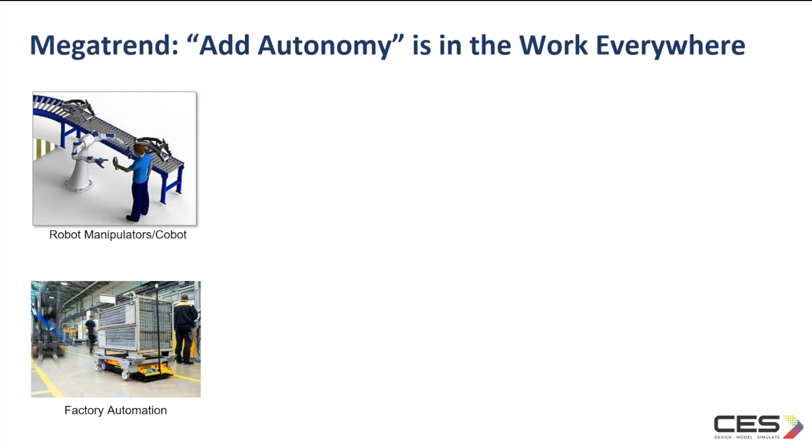Autonomy is a trend happening across industries. You will find defense contractors building next generation autonomous underwater vehicles, autonomous drones, unmanned ground vehicles, and autonomous vessels. You can also find traditional big machine makers in construction, mining, and agriculture actively investing in autonomous capabilities. And in the advanced air mobility trend, there are also commercial aircraft makers adopting similar sensing and automation technologies from robotics into their aircraft.

Today's webinar is the second in the series about autonomous systems. The first webinar was held on 17th September, and in that we covered model-based system engineering for autonomous system design, from architecture to implementation, followed by verification and validation. We explained the different MathWorks tools that can be used for those activities.

Today's webinar is more focused on system design and dynamics modeling, and we will also give an overview about software in the loop, processor in the loop, and hardware in the loop testing.

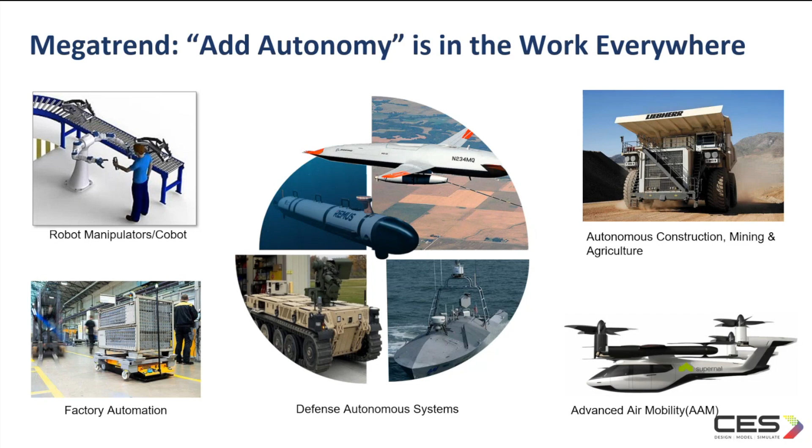Here is the agenda of the webinar. First, we'll have a look at different phases of autonomous system development where MATLAB and Simulink tools can be used, and highlight the focus of the webinar series on autonomous systems. Secondly, we will consider common questions from robotic engineers. Next is system design and dynamics modeling for autonomous systems, and what MathWorks tools are available for the same.

It is followed by an overview on different testing methods like software in the loop, processor in the loop, and hardware in the loop, with Simulink Real-Time and Simulink Test. I'll also explain different MathWorks support mechanisms.

As I mentioned, we were conducting a series of webinars on autonomous systems. Webinar one focused on model-based system engineering for autonomous systems, from architecture to implementation, verification, and validation. In webinar two, today's webinar, we will talk about the platform design and also cover part of the verification and validation, mainly the SIL, PIL, HIL methods.

There is an upcoming webinar also, the date for which will be announced through the CES website, LinkedIn pages, etc. In that webinar, we will cover more towards the autonomy algorithms used for localization, planning, sensor fusion, and control. We will also cover hardware deployment in the next webinar.

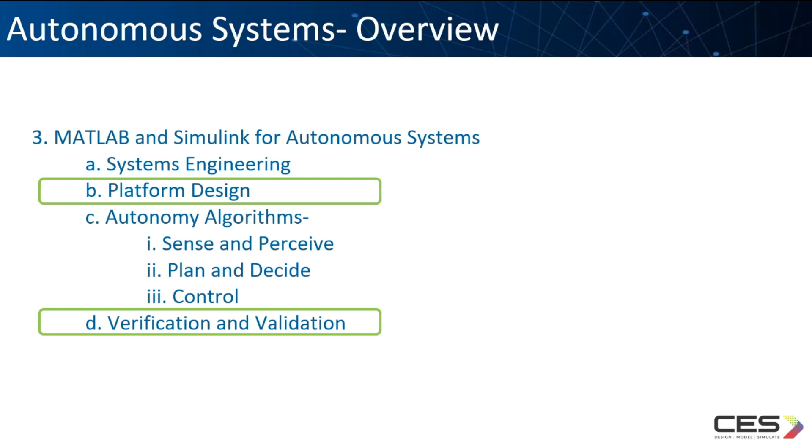Let's start with the common questions from robotic engineers. I have listed things like: how do you model the sensors and platforms—mainly the robot models you need to model, and then the sensors need to be modeled. And when it comes to the autonomous algorithms part, how can we design the algorithms for perception?

How do you do the planning algorithms? How can we control it? And when it comes to the hardware part, how do you test and deploy the robotic applications? How can we simulate it? How can we analyze it? How can we deploy the algorithms? How can we generate the code for these algorithms?

So throughout this webinar, we will mainly consider how can we model the robot models, how can we model the sensor models, and as we have included an overview of SIL, PIL, HIL, we will also be focusing a little bit on the testing and the deployment side.

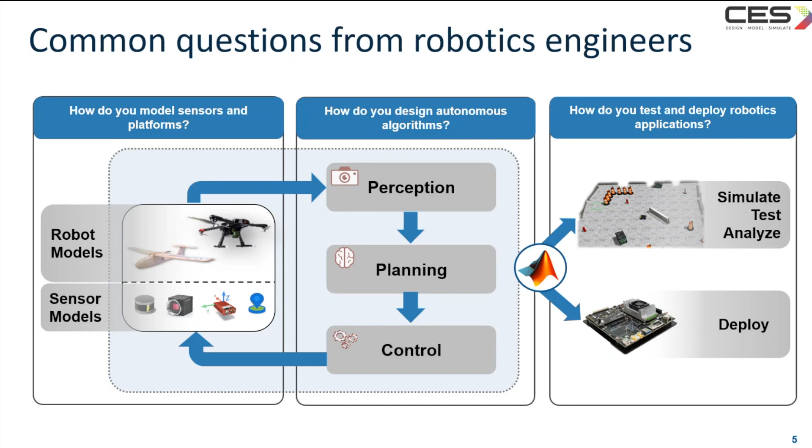Let's go to the system design and dynamics modeling part. As you know, the autonomous system domain is very vast, and it's impossible to discuss the platform design of all verticals. So what I have decided is we will take examples of platform development for UAV, AUV, or mobile robot, but we will share the details of MathWorks solutions which can be used for autonomous systems in general.

I have shown this slide before. Let's start with the modeling of the robots. So how do you model the robots and the sensors? When it comes to modeling, it can be a physical model, or it can be a kinematics model, or it can be an external model.

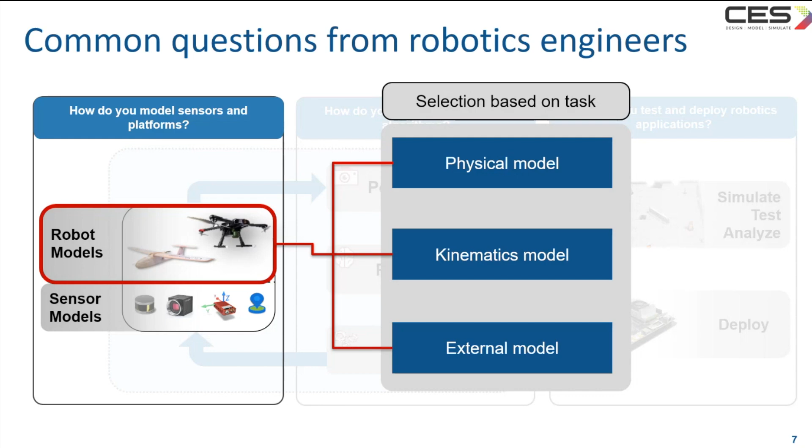If it is a physical model, let's consider the example of a bumper car. Okay, before going into the example, let me add one point here.

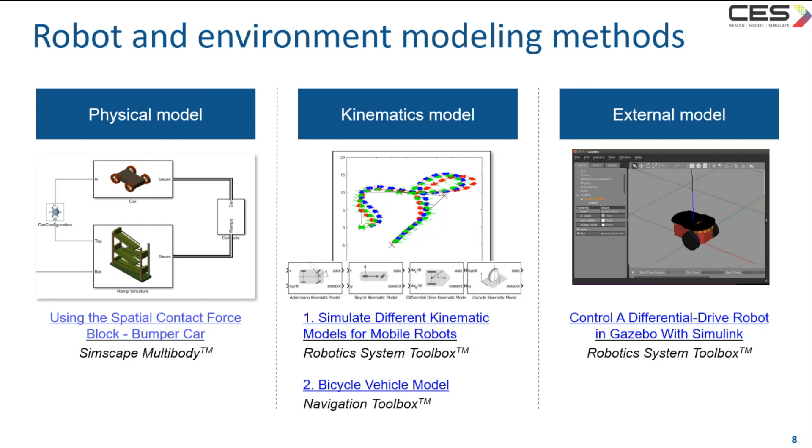Coming to the modeling of robotic dynamics, again the main tool we suggest is Simscape Multibody. It supports dynamics modeling for automotive, two-wheeled vehicle, crawler, legged, and drone systems. It comes with a contact forces library, and it also supports CAD import from third-party tools. We'll see more details of the capabilities of Simscape Multibody in upcoming slides.

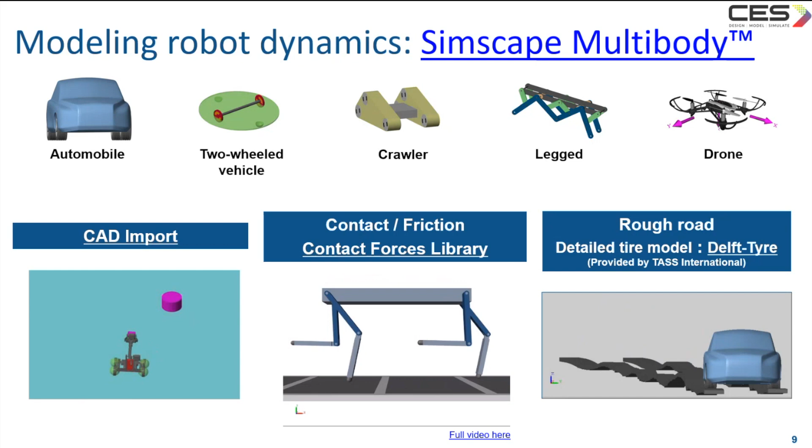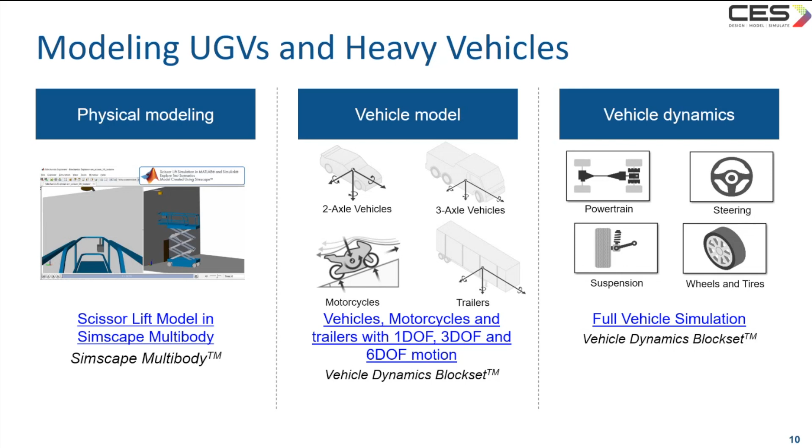This is an example of modeling and control of a Mars rover. This shows the steps included: Mars rover modeling, terrain modeling, spatial contact force modeling, path tracking control, and end effector control. The grid surface block is used for modeling the rigid terrain surface.

The tools used for this example are mainly Simscape Multibody and Robotics System Toolbox. Point cloud and spatial contact force blocks are used for modeling the contact between the rover wheels and the rigid terrain. Pure pursuit is used for path tracking control of the rover, and kinematic solver with trapezoidal velocity profile trajectory is used for joint space trajectory planning and control of the rover arm.

You can find this example also on the MathWorks website. We'll see the details of it in later slides.

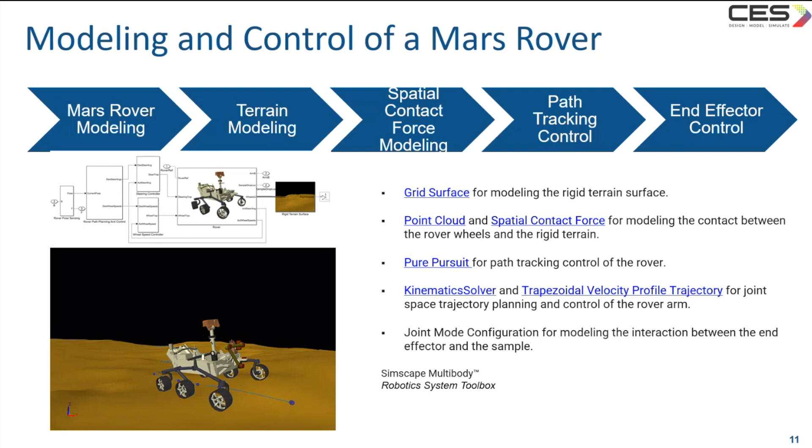Next is about sensor models. How can we import the sensor data? How can we simulate the sensor models? If it is an external sensor model, how do we work with that?

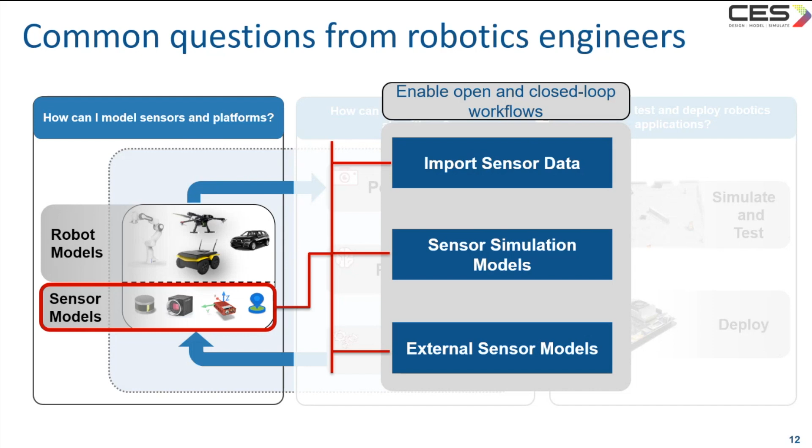So these examples, the first one is about importing sensor data. It uses the read data block to play back data from a Rosbag log file recorded from a Jackal robot from ClearPath Robotics. This example uses ROS toolbox and Simulink.

The next example is about how to model IMU, GPS, and INS. This is done with the help of navigation toolbox, which helps you model inertial measurement units, global positioning systems, and inertial navigation systems. You can model specific hardware by setting the properties of your models to values from hardware datasheets, then tune the environmental and noise properties to mimic real world environments. You can use these models to test and validate your fusion algorithms, or as placeholders while developing larger applications. You can search with the same text on the MathWorks website to find this tutorial, which provides an overview of inertial sensor and GPS models in navigation toolbox.

Next is about the external model, specifically co-simulation between Simulink and Gazebo. This example mainly uses Robotics System Toolbox and Simulink, and explains how to set up a synchronized simulation between Simulink and Gazebo to send commands and receive data from Gazebo.

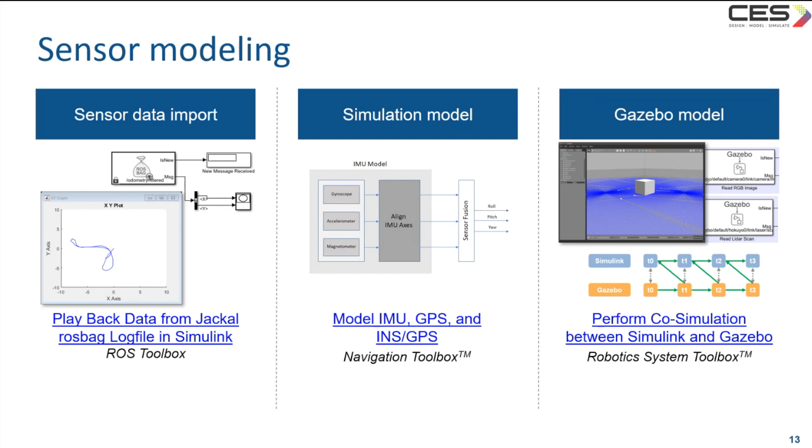We have more examples that will help you find errors in wheel encoders, and show how to create synthetic sensor data if you need that. The example in the middle helps you create synthetic sensor data from an inertial sensor. On the right side, it's about automatic tuning of the INS filter, which is an object based on a continuous-discrete extended Kalman filter that estimates device pose. Manual tuning of this filter, or finding optimal values for the noise parameters, can be challenging. This example illustrates how to use the tune function to optimize the filter noise parameters.

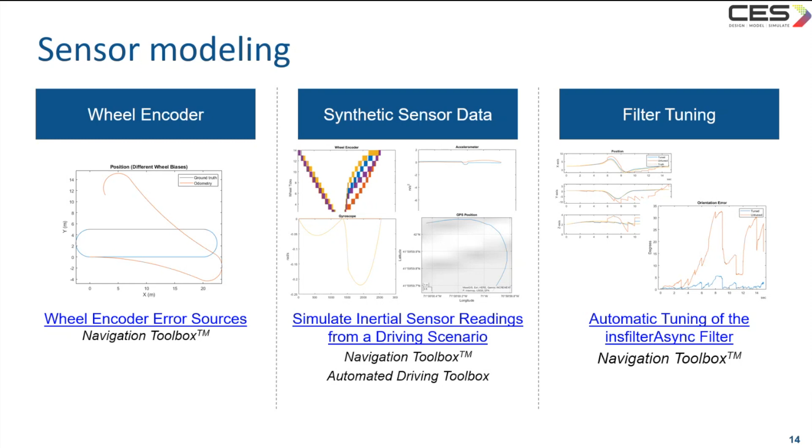This slide is about perturbing IMU sensor readings. Perturbations are essentially errors on individual measurements, examples of which include uncalibrated sensors. In the navigation toolbox, we have perturbations and perturb functions to perturb the IMU sensor readings generated by the IMU sensor system object. By perturbing the IMU, you can perform noise analysis to test your fusion filter with different IMU parameters and noise ranges. First you need to create the IMU sensor object, then show the perturbable properties, apply them, and simulate the IMU sensor data with the perturbations.

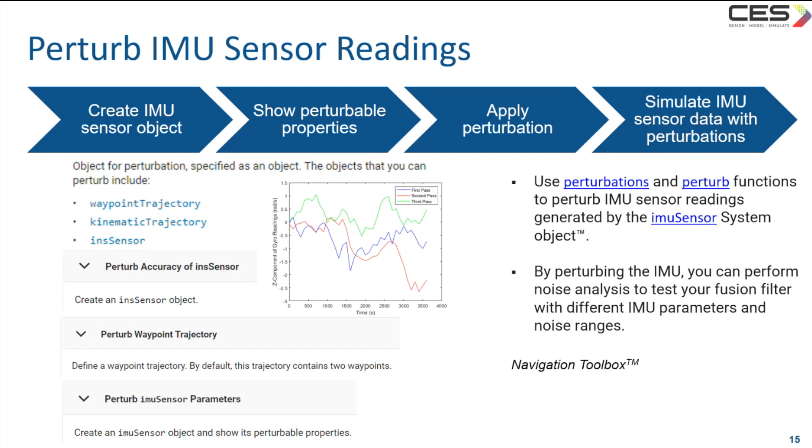This is about how to generate off-centered IMU readings. This example generates two 9-axis IMU readings, one IMU mounted at the vehicle's origin and the other mounted at the driver's seat. You can specify the offset between the vehicle origin and the IMU mounted at the driver's seat, and also visualize the locations of the sensors. It uses the navigation toolbox.

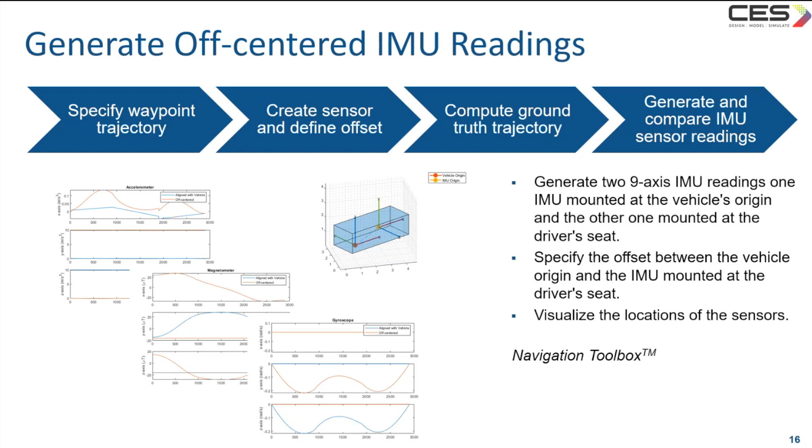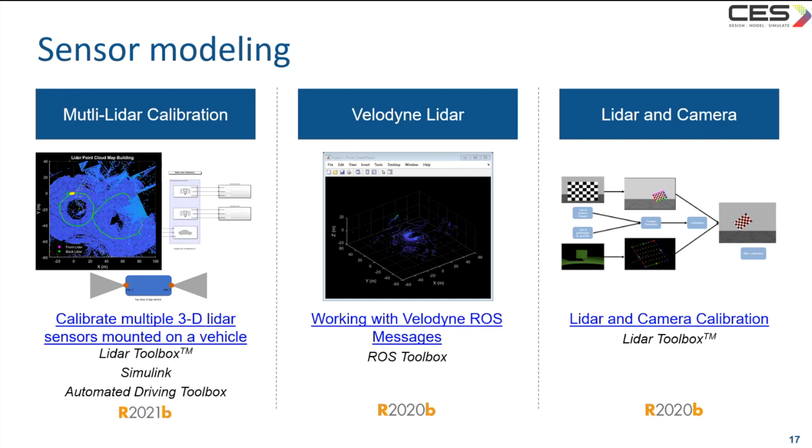So we have discussed the options in MathWorks for robot modeling as well as sensor modeling. Now this is an example of a UAV package delivery, which shows through incremental design iterations.

It basically shows through incremental design iterations how to implement a small multi-copter simulation to take off, fly, and land at a different location in a city environment. This example uses UAV Toolbox, Aerospace Blockset, Aerospace Toolbox, Control System Toolbox, Navigation Toolbox, Stateflow, Simulink, and Simulink 3D Animation.

In this example, the steps involved are: first we have to set up the model for a four waypoint mission using a low fidelity multi-rotor plant model. Once the model is set up, we connect it to a GCS, and set it in a basic cuboid scenario. If you have obstacle avoidance algorithms to incorporate, we can do that, and then the same can be tested in a photorealistic simulation using Simulink 3D Animation. So the end result is what you are seeing here.

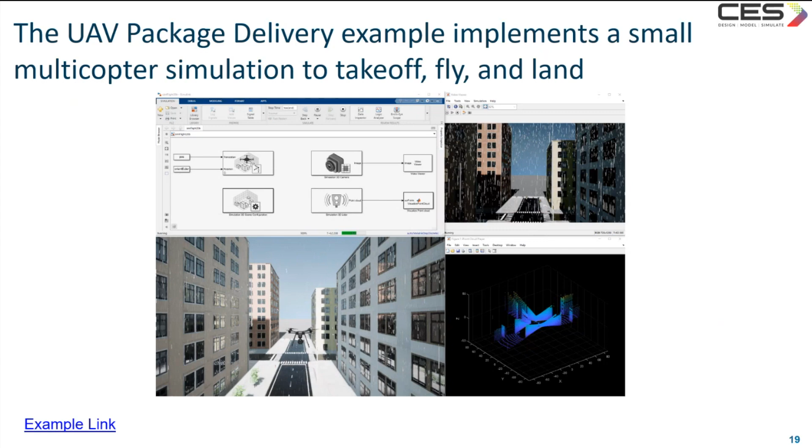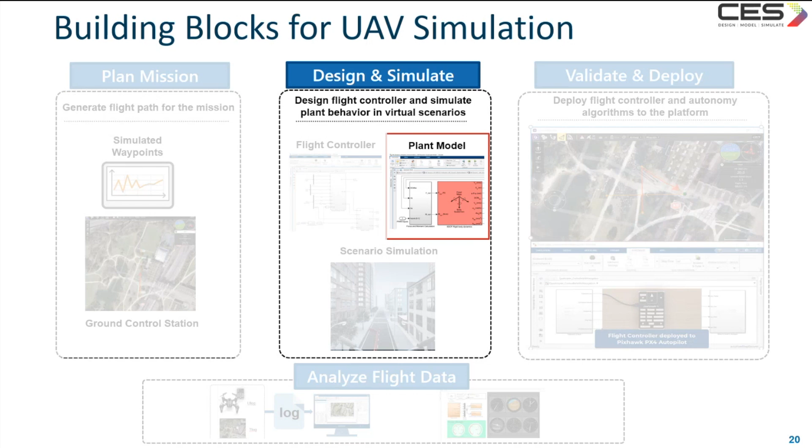We'll see the details of this model in the upcoming slides. So I mentioned the previous one was about how to develop a UAV model in an iterative way. Today's webinar focus is on system design, so we will just see how to do the plant model in an iterative way. Before designing a flight controller, a model of the plant is anyway needed, right? So I mentioned Simulink, UAV Toolbox, Aerospace Blockset, and Simscape can provide the tools for that.

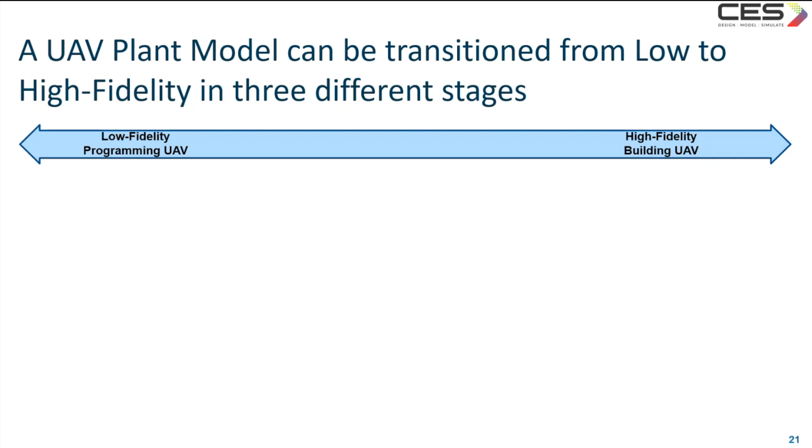And we can develop a UAV model from low fidelity to high fidelity in three different stages. So what is the advantage of developing the plant model in Simulink? What you get here is the freedom to decide on the appropriate level of fidelity. You can start with one of our approximate guidance models for low fidelity, and build a more precise model using point mass and environment blocks provided in our tools, or use Simscape to build a high fidelity physical model of the plant.

The left hand side shows the low fidelity guidance model which is available in the UAV toolbox, and as more details are available, you can migrate it to the high fidelity model. Or, if you have a specific design in mind, you can use Simscape Multibody to import the platform design into the Simulink environment.

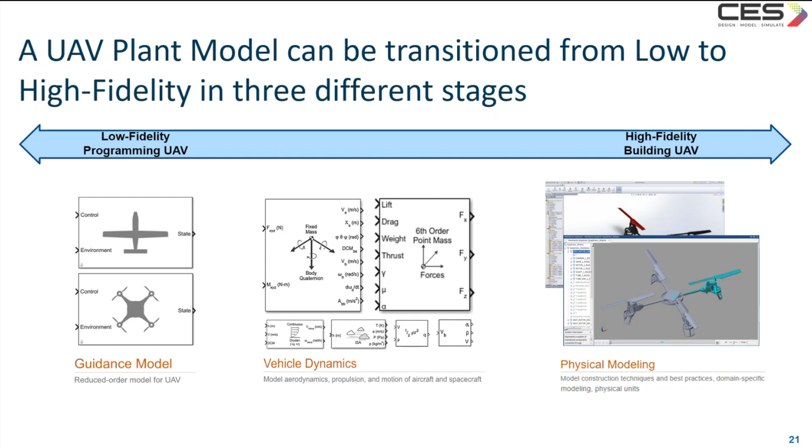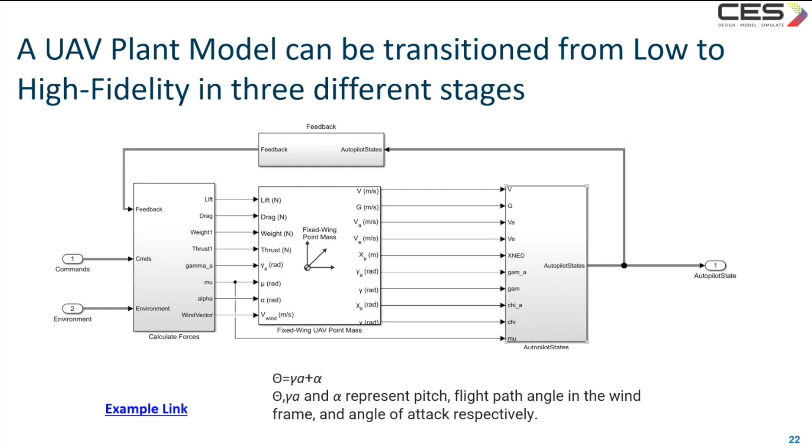This example covers the process of transitioning through these stages of fidelity. I'll play a video now. This example is also available on the MathWorks website. It explains how to transition from low fidelity to high fidelity.

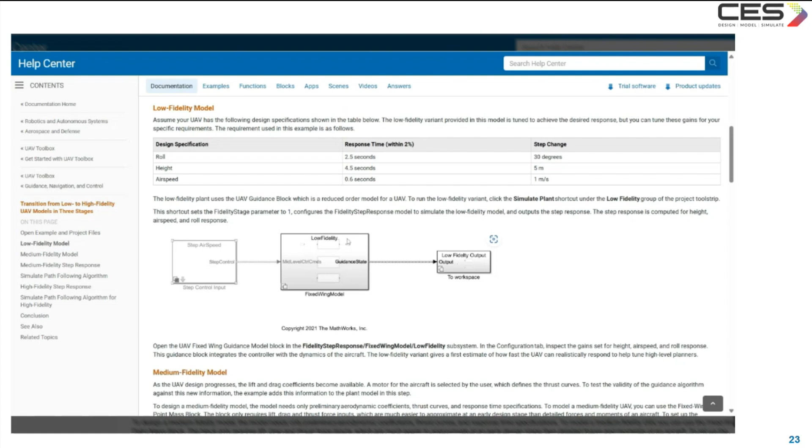So a UAV algorithm designer can start with a low fidelity model and evolve their plant model as and when additional data becomes available, to concurrently design a guidance algorithm sooner. Designing a guidance algorithm using only a low fidelity model can also pose risk. Without a controller or aerodynamic constraints, an optimistic guidance technique can fail for a real UAV with slower aircraft dynamics.

So let's assume you have only the information like roll, height, and airspeed shown in the table for the low fidelity modeling. We can use the UAV guidance block, which is a reduced order model of the UAV.

As you get more information, like the lift and drag coefficients, and once you choose a motor for the aircraft, then you get the thrust curves also. Then we can go for the medium fidelity model, and you can test it. You can verify the medium fidelity step response, and also simulate the path following algorithms with the medium fidelity model.

And once we get more information, like all the forces and moments, then we can use a high fidelity plant and input all the forces and moments to a 6DOF block, add onboard sensors, and model actuator dynamics for the UAV. This model basically reuses the outer loop controller designed for the medium fidelity model, validating that the medium fidelity model provided useful intermediate information, which we can then reuse for the higher fidelity model also.

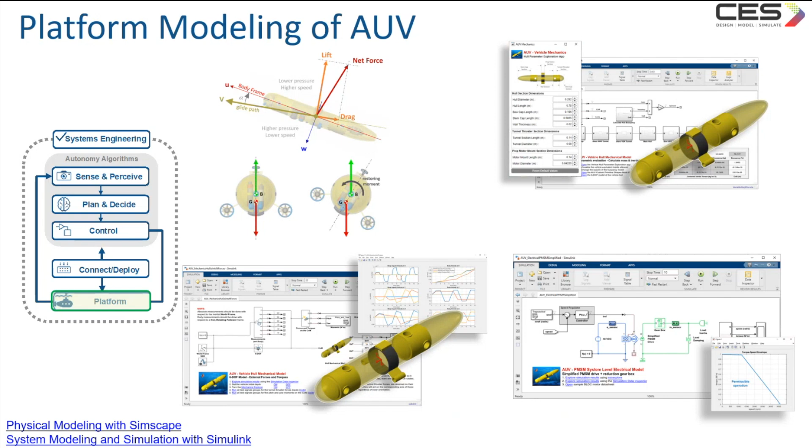For more information on modeling the autonomous underwater vehicle, please check the AUV tab under the Aerospace and Defense page in the solutions section on the MathWorks website.

I have been mentioning Simscape Multibody, Simscape Electrical, Simscape Fluids, etc. They basically help you model and simulate multi-domain physical systems. We also have Robotics System Toolbox, which helps you design, simulate, test, and deploy robotic applications. And we have the ROS Toolbox, with which you can design, simulate, and deploy Robot Operating System based applications.

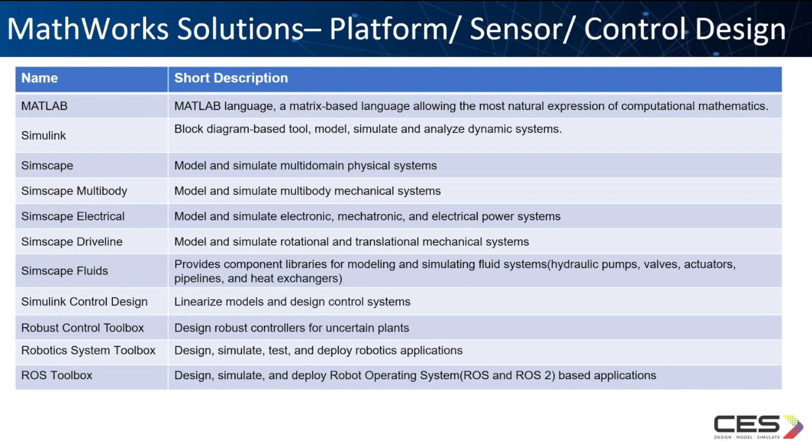And we have UAV Toolbox. It provides tools and reference applications for designing, simulating, testing, and deploying drone, unmanned aerial vehicle, and advanced air mobility applications. And we have Aerospace Toolbox. It helps you analyze and visualize aerospace vehicle motion using reference standards and models.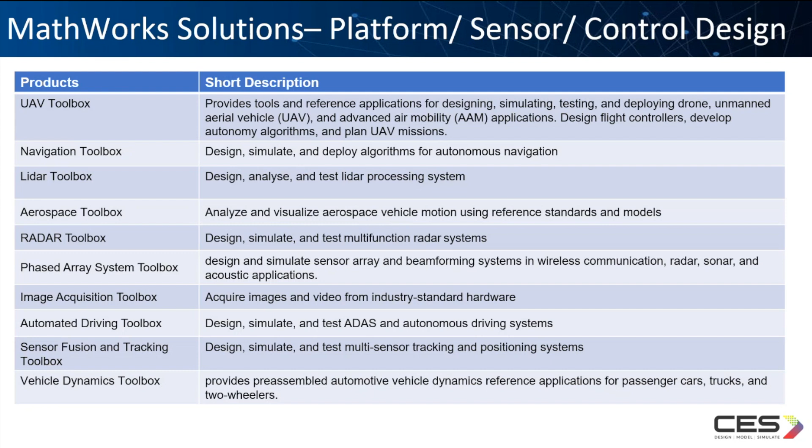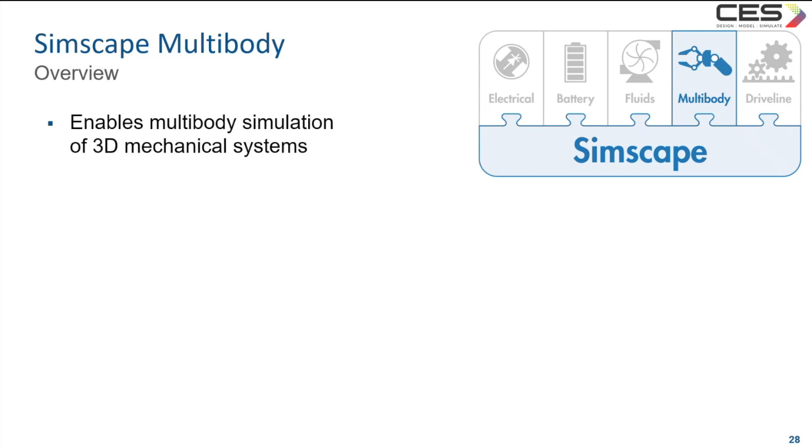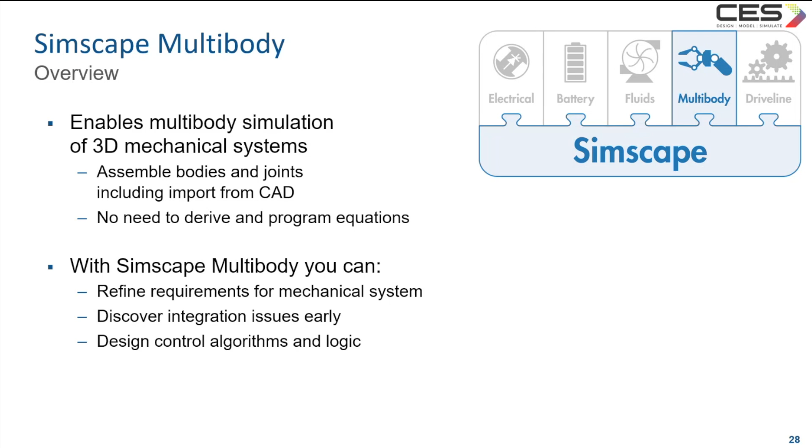Let's see some of the main toolboxes related to platform design. First and foremost is Simscape Multibody. It basically enables multibody simulation of 3D mechanical systems. With Simscape Multibody, you can refine the requirements for the mechanical system, discover integration issues early, design control systems and control algorithms and logic, and also test embedded software without hardware prototypes.

If you face any difficulty while developing your application using Simscape Multibody, for example if you couldn't find a particular block, we also support importing designs from other CAD software. So you can assemble bodies and joints, including import from CAD software.

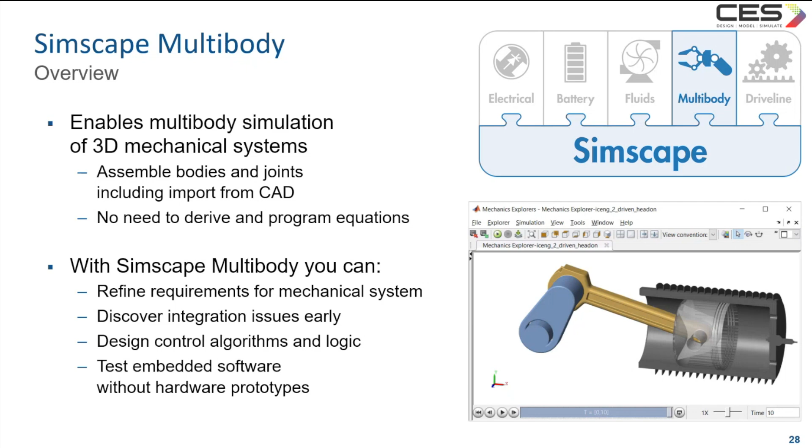So the key features are: Simscape Multibody supports part definition tools, and you can import parts and assemblies from CAD software. You can also use standard and custom kinematic relationships, and simulation modes for dynamics and kinematics. It also supports C code generation, so you can test embedded controllers without hardware prototypes.

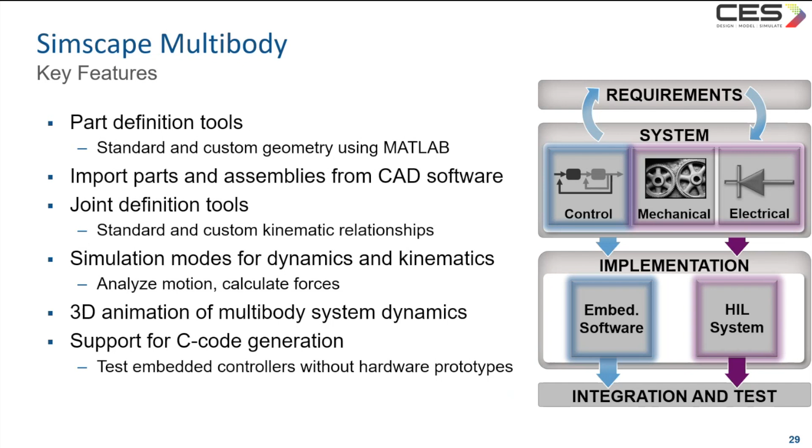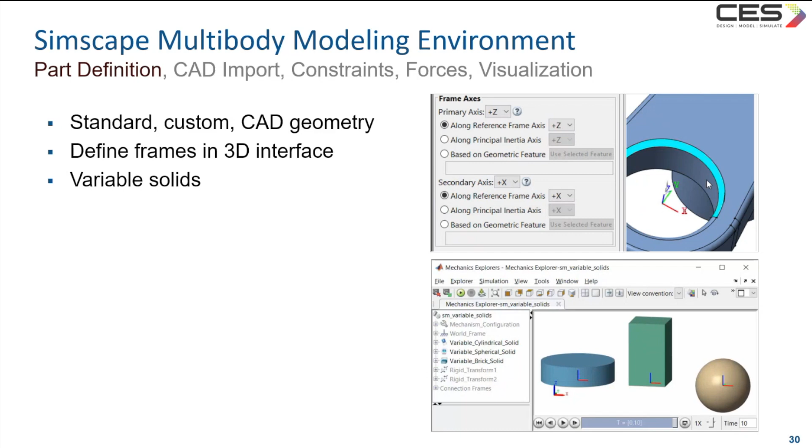Let's have a look at the part definition features of Simscape Multibody. As mentioned, it supports standard, custom, and CAD geometry. You can define frames in a 3D interface, and variable solids are also supported. Flexible bodies are also supported.

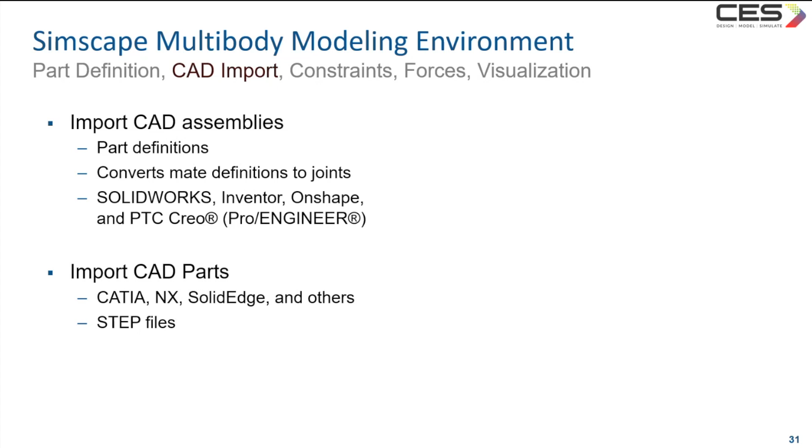Coming to CAD import, as mentioned, you can import either the part definitions or the CAD assemblies from SolidWorks, Inventor, Onshape, or PTC Creo. For software like CATIA, NX, and Solid Edge, only importing of CAD parts is supported, and you have to use STEP file mode for that. I have more details in the next slide.

So basically, Simscape Multibody supports importing CAD assemblies. This can be supported with the Simscape Multibody plugin, if the Simulink plugin is supported for that CAD software. Then you can directly export from the CAD software in the form of XML files or STEP files, and the full assembly can be exported to Simscape Multibody. But for CAD software not supported by the Simulink plugin, you can still use the native CAD and STEP files, referring to the files directly.

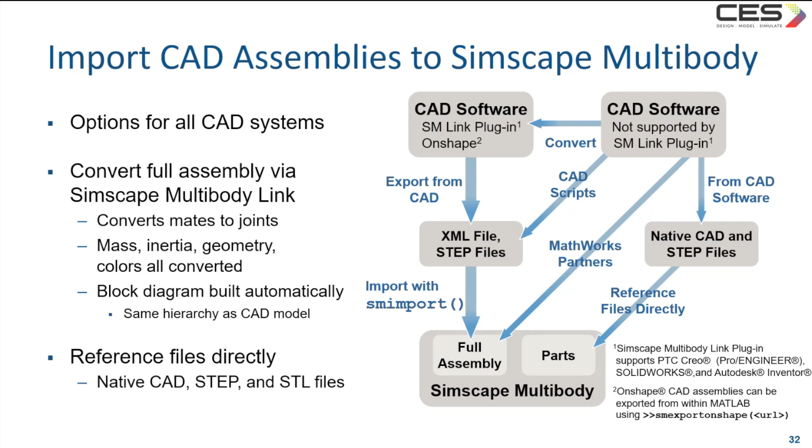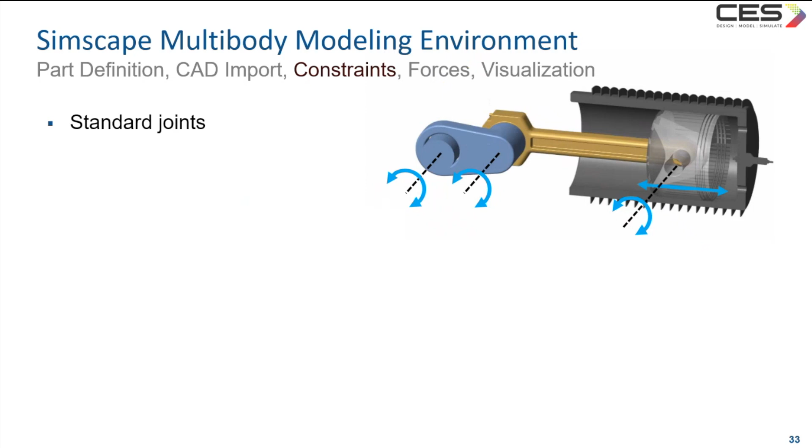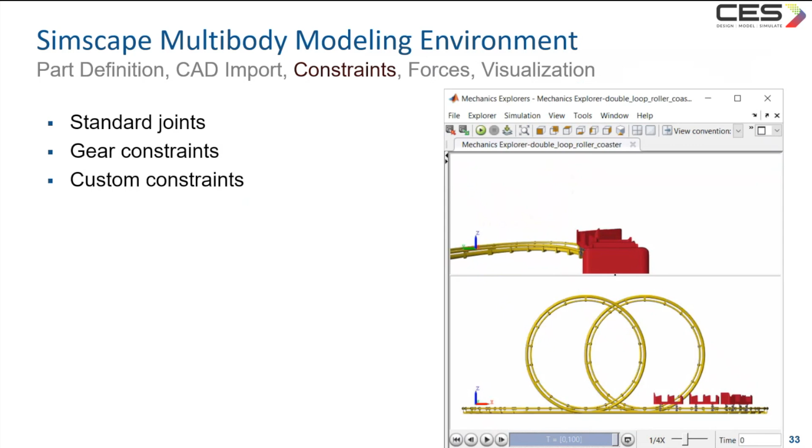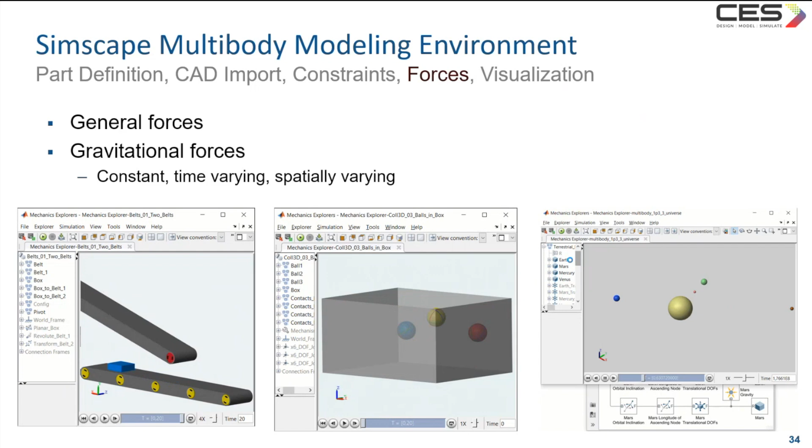Coming into the Simscape Multibody modeling environment, the constraints include standard joints, gear constraints, custom constraints, and cable mechanisms. And this is about the forces which can be modeled in Simscape Multibody: general forces as well as gravitational forces. When it comes to gravitational forces, they can be constant, time varying, or spatially varying.

And for the visualization, you can review the animation, you can select the views, you can define the camera positions, you can explore the models, you can show or hide the objects, and you can also export the video.

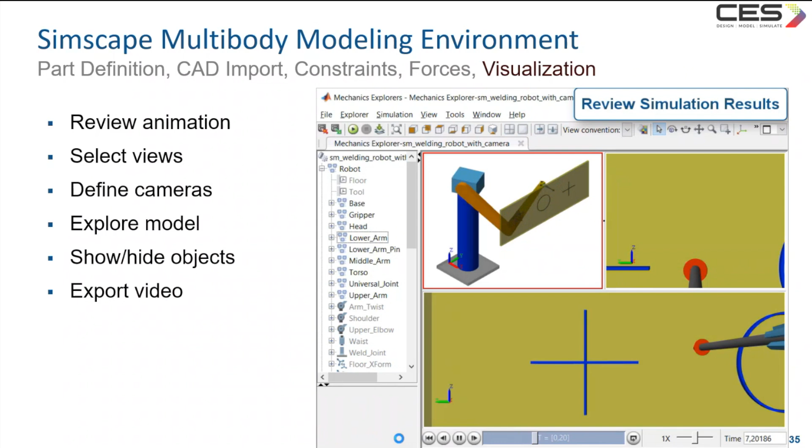So with Simscape Multibody, you can test the embedded control system. You have the physical system as well as the control algorithm for that, this control algorithm model.

Sorry, here happened some technical issues.

So with Simscape Multibody, you can test the embedded control system. You may have the control algorithm and the physical system. The control algorithm can be converted into C code, CUDA code, or HDL code, or whatever format you want, using the coders available from MathWorks. This also enables HIL testing as well as processor in the loop testing.

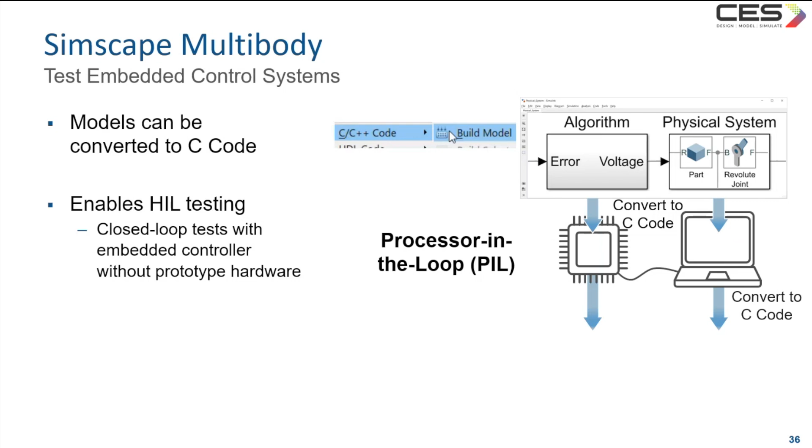All right, that's a lot of information about the Simscape Multibody. But how can I miss mentioning the Simscape vehicle templates? It's a set of templates for creating custom vehicle models using Simscape for use within Simulink.

With this, you can explore the powertrain architectures for conventional, hybrid, battery electric, or fuel cell vehicles. You can also modify the suspension design by moving hard points obtained from CAD, and connect custom multi-link suspensions to hydraulic and pneumatic systems.

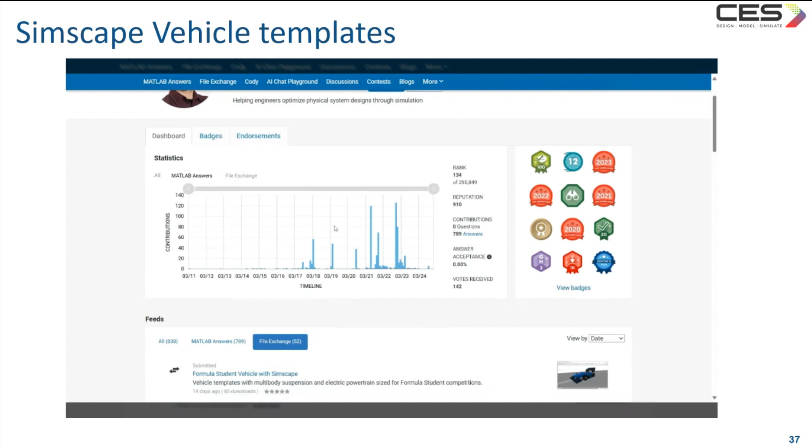Now you may think, this sounds good, Anila, but this is not my cup of tea. Don't worry, we have more files for you. You can see the name Steve Miller here. I have placed a screenshot here, so if you click on that, it will take you to this page, and there is a tab called File Exchange.

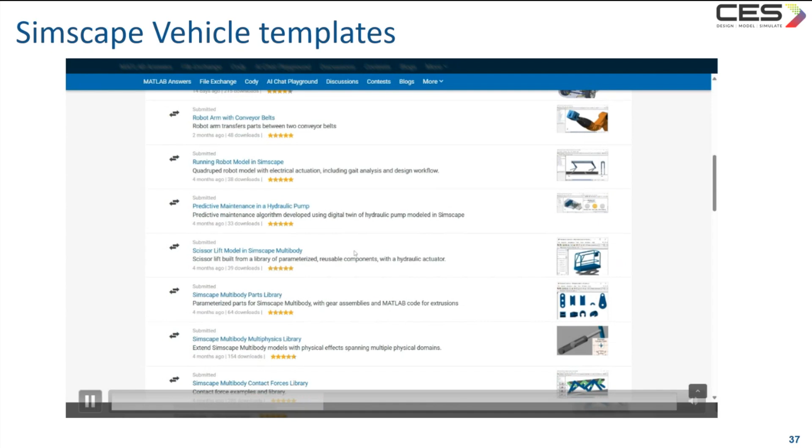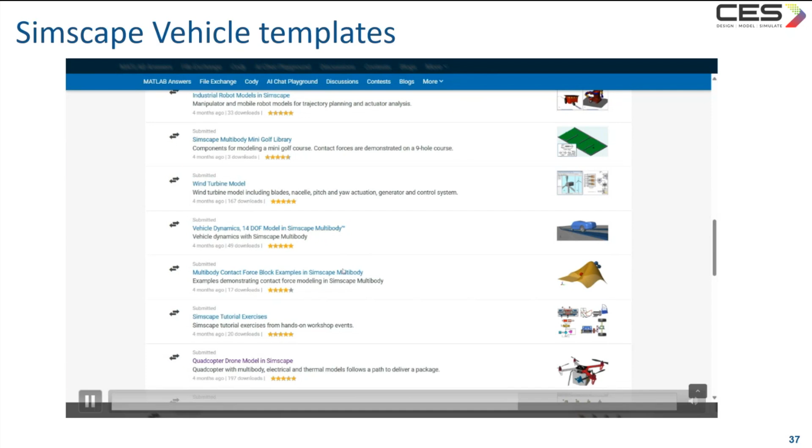In this tab, you can see different Simscape Multibody files, for example, robot arm with conveyor belts, running robot models in SimScape. You can see the model of an industrial robot, vehicle dynamics with 14 degrees of freedom, and also a quadcopter drone model in SimScape. I showed a Mars rover model in the initial slide, and this file can also be accessed from here. You can download it from this page, available in the MATLAB File Exchange.

Another important toolbox in the field of autonomous systems is the Robotics System Toolbox. It provides an integrated environment for designing, simulating, testing, and deploying robotic applications, and enables application development for manipulators, ground robots, and humanoid robots.

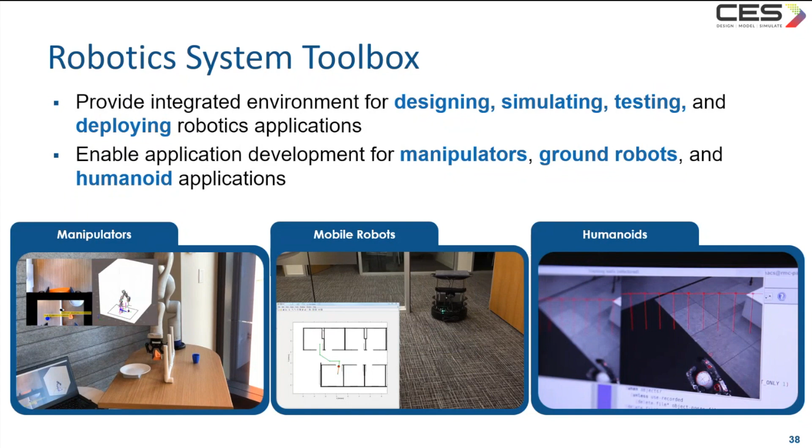The robotic system comes with robot models, specialized algorithms, simulation, and connectivity deployment. In the robot models, you can model kinematics and dynamics of mobile robots and manipulators. It comes with a library of commonly used robots, and has the provision to import URDF files or Simscape Multibody models to create custom robot models. You can also visualize and simulate robot motion to validate your algorithms, and perform inverse kinematics calculations on your robot models.

In the specialized algorithm part, for manipulators, the toolbox includes algorithms for collision checking, path planning, trajectory generation, forward and inverse kinematics, and dynamics using rigid body tree representation. For mobile robots, it includes algorithms for mapping, localization, path planning, path following, and motion control.

In the scenarios and simulation part, you can author robot scenarios and incorporate sensor models to test autonomous robot algorithms in a simulated environment. You can also validate your robot models in the Unreal Engine simulation environment or by interfacing with the Gazebo simulator.

On the hardware connectivity and deployment part, you can connect with robotic platforms such as Universal Robots UR or Kinova Gen 3 to deploy cobot applications. You can also generate C or C++ code and MEX functions for RCP, rapid control prototyping, or HIL, hardware in the loop testing.

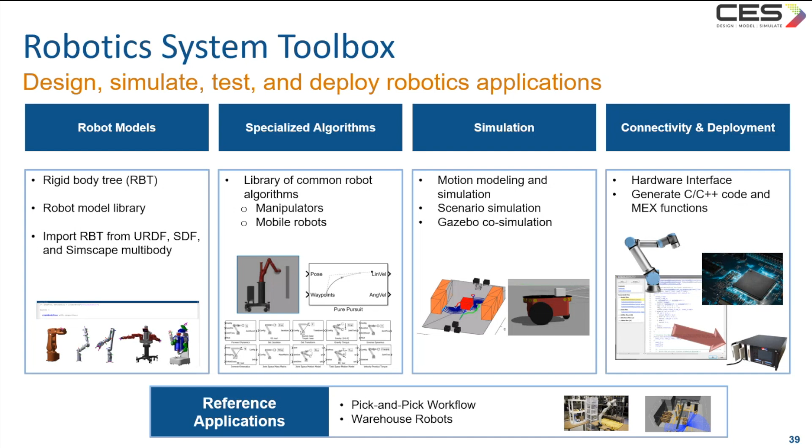In 2024B, new manipulator and gripper models have been added to the robot model directory: the Robotiq EPick 1-cup vacuum assembly, EPick 2-cup vacuum assembly, and EPick vacuum cup. These models are newly added in R2024B, so if you're working with these, don't forget to check it out.

ROS Toolbox is another important tool in the field of robotic application development or autonomous system development. It basically provides an interface connecting MATLAB and Simulink with the Robot Operating System, whether ROS or ROS2.

With this toolbox, you can design a network of ROS nodes and combine MATLAB or Simulink generated ROS nodes with your existing ROS network. It also enables you to verify the ROS nodes via desktop simulation, by connecting to external robotic simulators like Gazebo, or to hardware.

This toolbox also supports C++ and CUDA code generation, and it supports Simulink external mode. It basically helps you view the messages and change parameters while your model is running on the hardware.

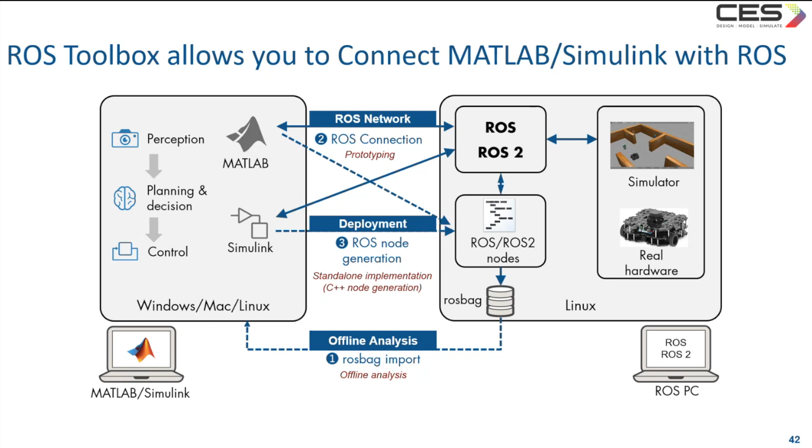Another important toolbox in the field of autonomous systems is the Aerospace Toolbox. It provides standards-based tools and functions for analyzing the motion, mission, and environment of aerospace vehicles. It includes aerospace math operations, coordinate system and spatial transformation, and validated environment models for interpreting flight data. It also includes 2D and 3D visualization tools and standard cockpit instruments for observing vehicle motions.

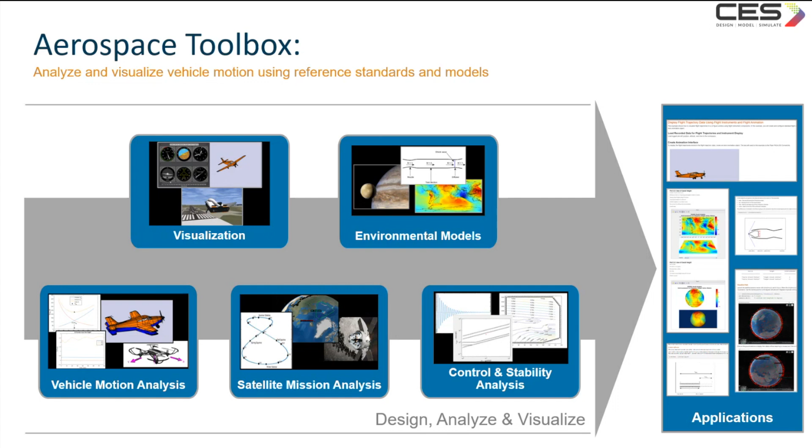So we'll see what options are available in each area: visualization, environment models, vehicle motion analysis, and satellite mission analysis. What all the options are will be covered in the next slide.

In the visualization part, the Aerospace Toolbox includes flight instruments, flight simulator interfaces, animation based on MATLAB, virtual reality animation, etc. And in the vehicle motion analysis part, we have options for fixed-wing aircraft, flight parameters, flight instruments, data import, coordinate systems, unit conversions, etc.

For control and stability analysis, fixed-wing aircraft, flight control analysis, stability analysis, etc. are included. For environment models, I have listed a few options. And for satellite mission analysis, we have different options like constellations, eclipse analysis, orbit propagation, etc.

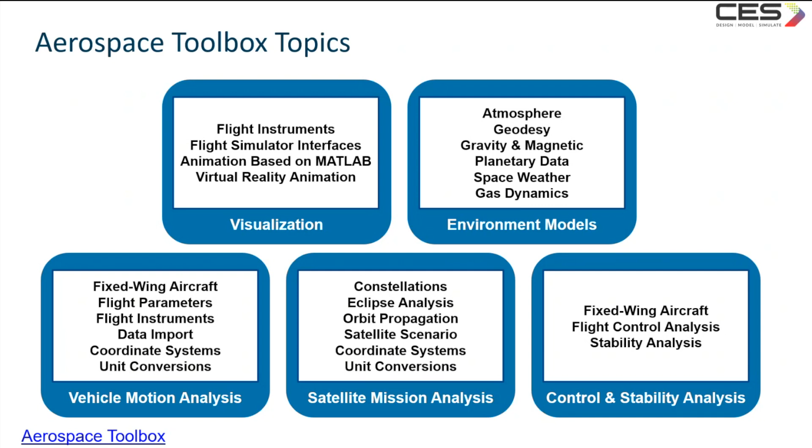Another important tool in the field of autonomous systems is the UAV Toolbox. It provides options for guidance, navigation, and control, scenario simulation, connectivity deployment and HIL, and flight data analysis. In the guidance, navigation, and control part, you have UAV guidance models, waypoint and orbit follower, motion planning and path manager, controller templates, and PID auto-tuning.

In the scenario simulation part, we have multiple options like cuboid scenarios. It also comes with the UAV Scenario Designer app, and it has wind and sensor models. It also supports co-simulation with the Unreal Engine.

When it comes to connectivity and deployment, it supports the MAVLink protocol, and you can access PX4 autopilot peripherals. It also supports controller deployment and HIL testing with the Pixhawk and QGroundControl hardware. We'll see a simple example of this in the upcoming slide.

This toolbox comes with two reference examples, available on the MathWorks website. I have briefly explained the UAV package delivery example, and there is a VTOL controller template also available on the MathWorks website.

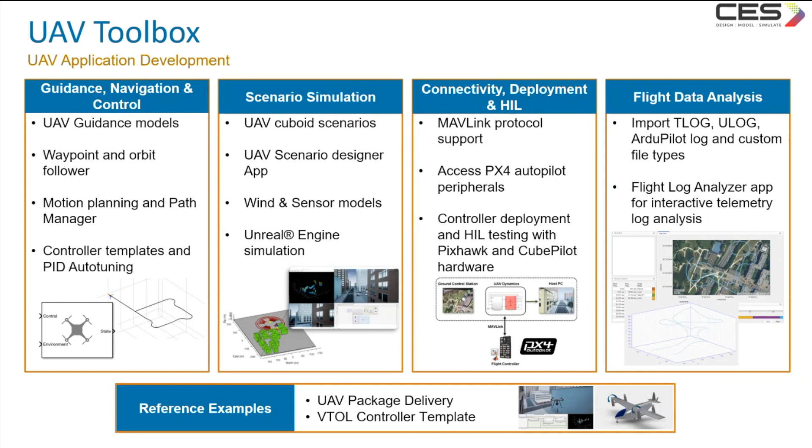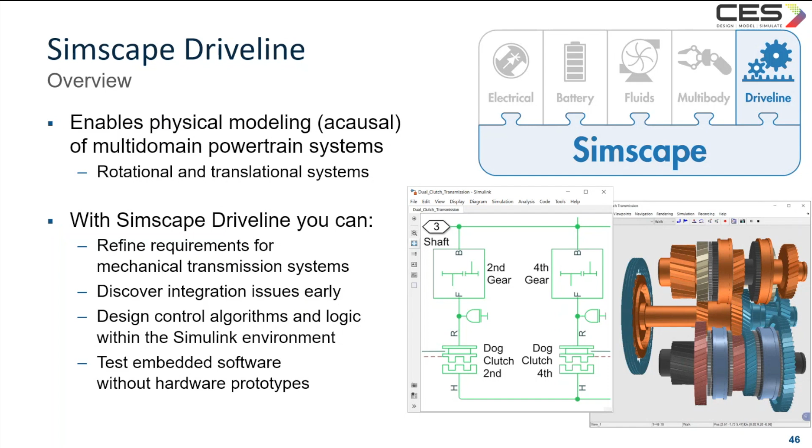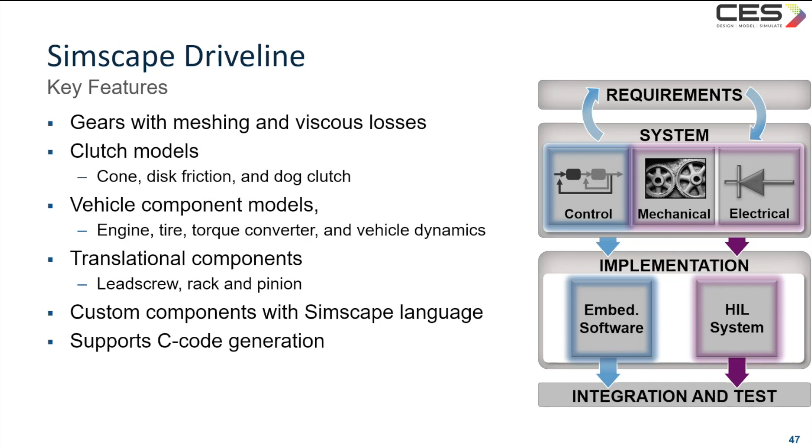These are some of the key features of Simscape Driveline: gears with meshing and viscous losses, clutch models, vehicle component models, and translational components. You can also customize components with the Simscape language, and it supports C code generation.

Now let's move on to the second half of this webinar: an overview of software in the loop, processor in the loop, and hardware in the loop.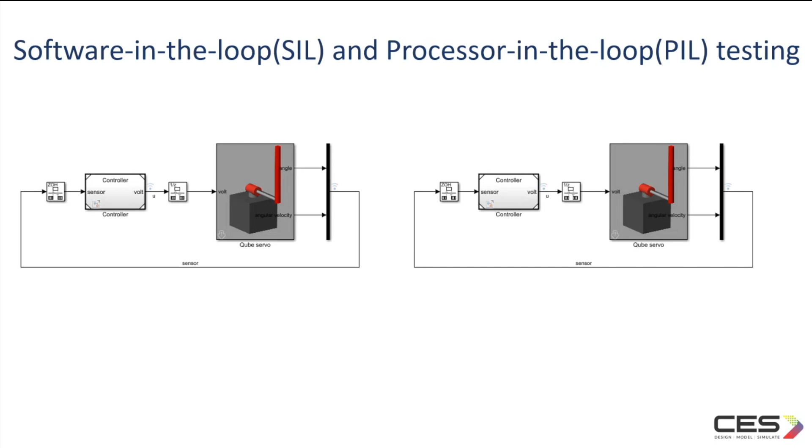In software in the loop simulation, it will generate the C code from the controller and execute the code as a separate process on your host computer. So from the controller we can generate the equivalent code, and then this code will be executed on the same host PC, along with the plant model. This code will be controlling the plant in software in the loop.

Whereas in processor in the loop, we also have to generate the code from the controller, but in this case the code will be running on the target platform.

Target platform we want to test against. In this example, Raspberry Pi is the target platform. In our hardware setup, the Raspberry Pi directly communicates with the plant used here, which is Quanser Qube. So the code will be flashed into the Raspberry Pi, and it will communicate with the plant here.

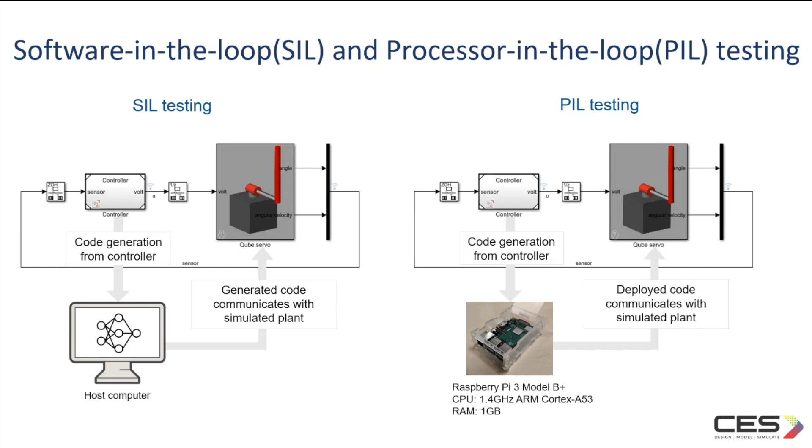But what are the benefits of doing this kind of test? Ultimately, we want to make sure that when we generate the code from the controller, the code performance is still acceptable. So by comparing the normal simulation results with the SIL or PIL results, you can test the numerical equivalence of your model and the generated code, and also make sure that you meet the real-time constraints.

In HIL testing, the controller model with the real production controller deployed on the target processor or microcontroller operates in the loop with a model of the plant running on the real-time target machine. In this configuration, you can test the production controller's response to fault conditions and potentially hazardous scenarios without the risk associated with such testing on the real plant.

Simulink Real-Time and SpeedGoat are the most recommended tools for this part. It can basically take you from simulation to rapid control prototyping and hardware in the loop testing in a single click. You can create, control, and instrument real-time applications that run on the SpeedGoat real-time target computers directly from your Simulink models, or with the MATLAB API or App Designer.

Basically, with Simulink Real-Time and SpeedGoat, you can simulate and test control designs and dynamics of your robots and manipulators, autonomous systems, motors, electric vehicles, powertrains, BMS, etc.

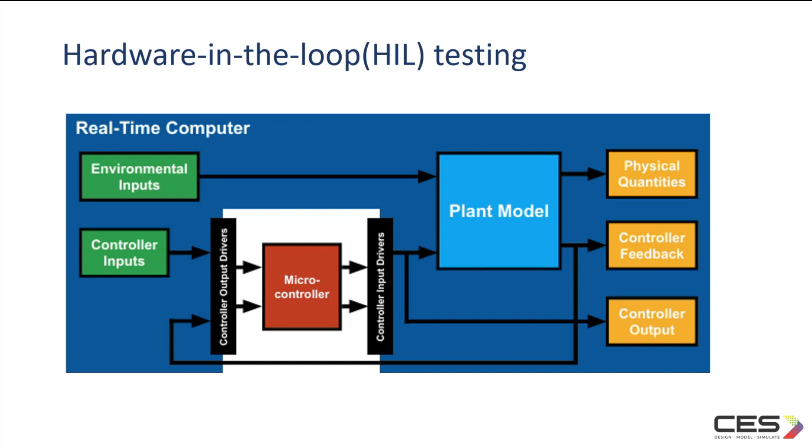Now, when we run the flight controller as a C++ executable using the autopilot's firmware on the host PC, this is what we call software in the loop. And then when we deploy the flight controller to the autopilot hardware board, we basically have to call it processor in the loop. But in some cases, like here, it's called hardware in the loop. But it's basically when you flash the code to the hardware, to the controller, the flight controller, it is processor in the loop. In the next slide, you'll get more clarity on this.

So this is just from the examples' perspective, it has been named hardware in the loop. You can also deploy the plant model on the hardware, and this is what we call a full hardware in the loop workflow. So here the actuators, sensors, and other drone peripherals are also in the loop.

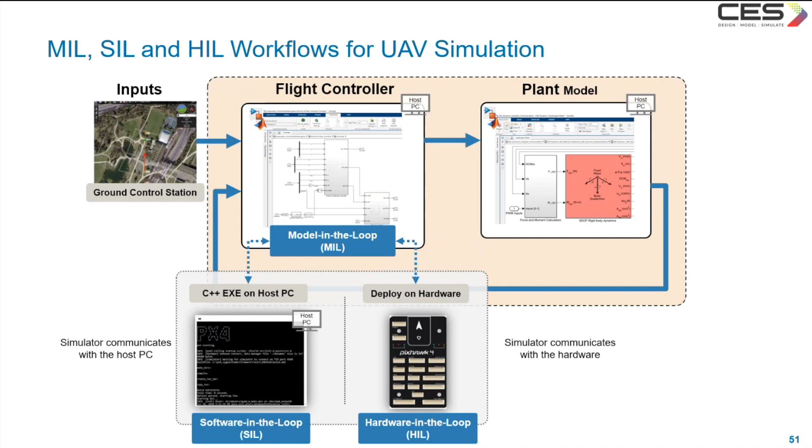We mentioned about the software in the loop and the processor in the loop, and it needs the code to be generated, and we will be deploying that generated code on the microcontroller or on the related hardware. But how to generate the code for that?

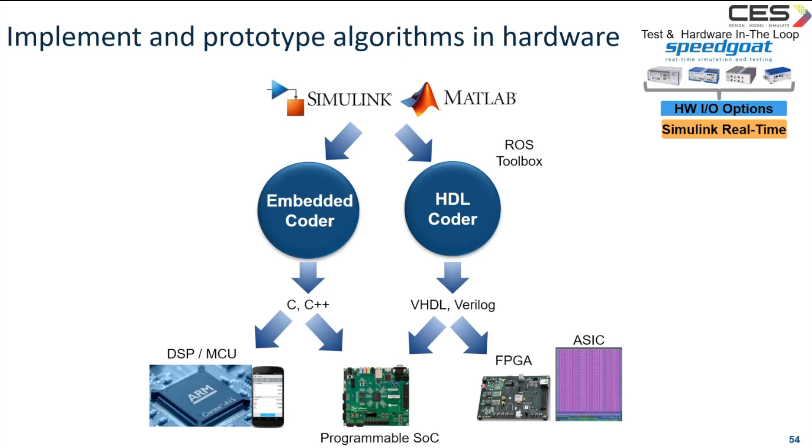MathWorks offers a range of coders for code generation. We have the Embedded Coder for C and C++ code generation, HDL Coder for VHDL and Verilog code generation, and we have the GPU Coder for CUDA code generation, and this ROS toolbox in support with the MATLAB Coder and Simulink Coder. It helps you with the ROS and ROS2 node generation. And we also have Simulink Real-Time as well as the SpeedGoat for helping you with rapid control prototyping as well as hardware in the loop testing.

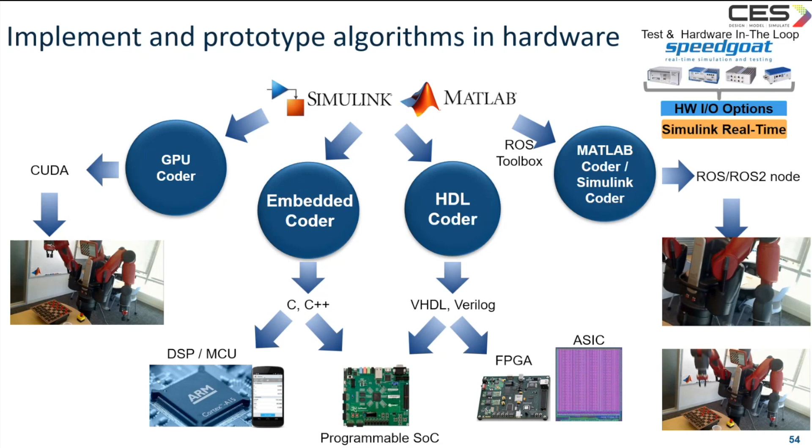And in the next example, it's basically for code generation for object detection by using single shot multi-box detector. This example uses GPU Coder, Deep Learning Toolbox, Computer Vision Toolbox, and GPU Coder interface for deep learning.

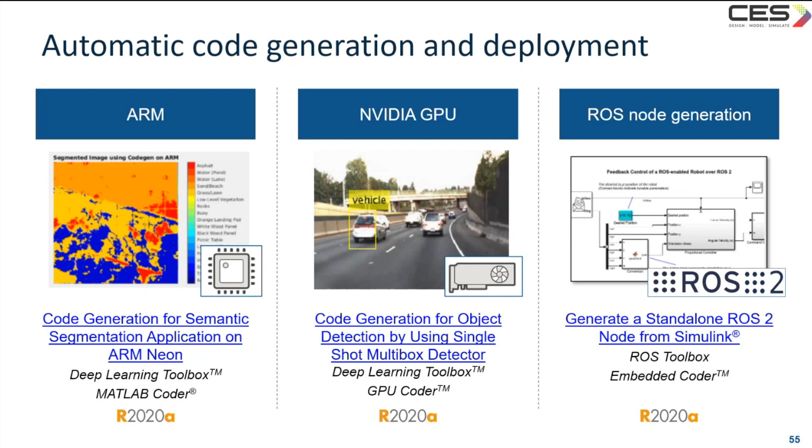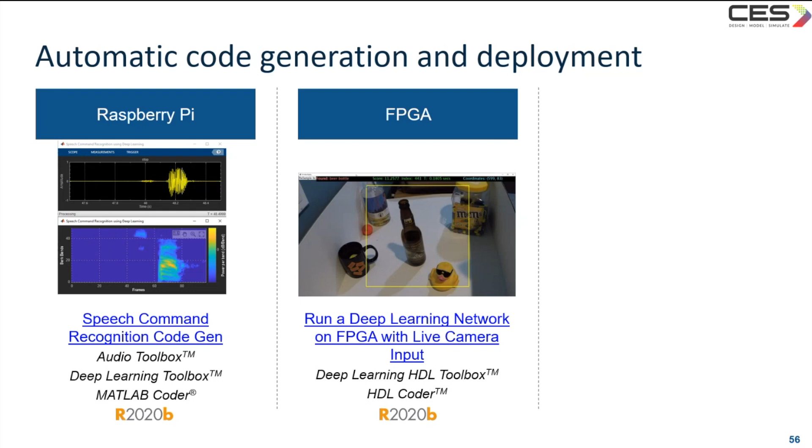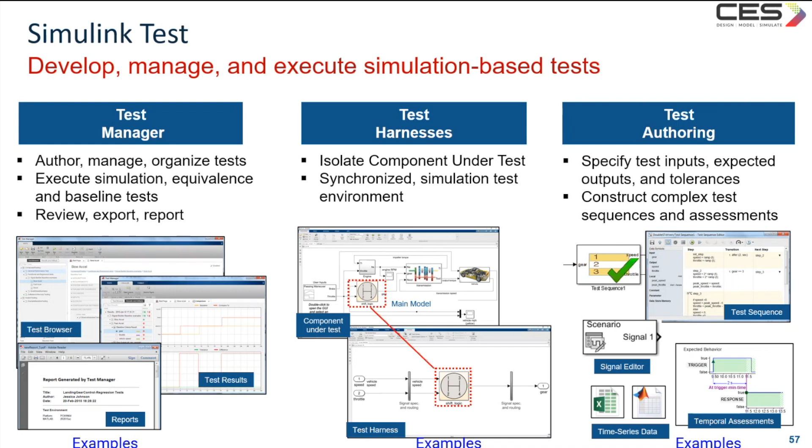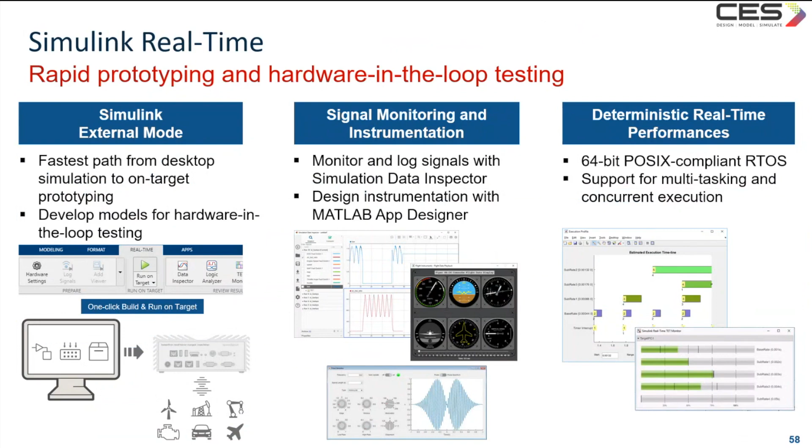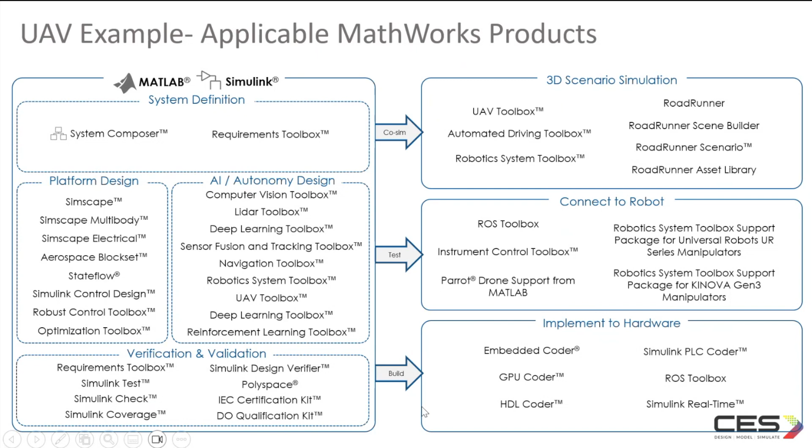In general, for developing autonomous systems, model-based design is the recommended approach. You can see here in different phases what tools are available. For the platform design, you can use MATLAB, Simulink, Simscape, Aerospace Blockset, and Simscape Multibody, and so on. And for the autonomous algorithms part, we have the Sensor Fusion and Tracking Toolbox, Computer Vision Toolbox, Robotics System, Automated Driving Toolbox, Navigation Toolbox, Reinforcement Learning Toolbox, etc. And for deployment, we have different coders. And for verification and validation, we have Simulink Test, Simulink Coverage, Polyspace, and certification products like the IEC Certification Kit. It supports DO-178C and ISO 26262 certification, etc.

This slide shows, not all the products are listed in this one, but again, model-based design is the recommended approach for autonomous system development.

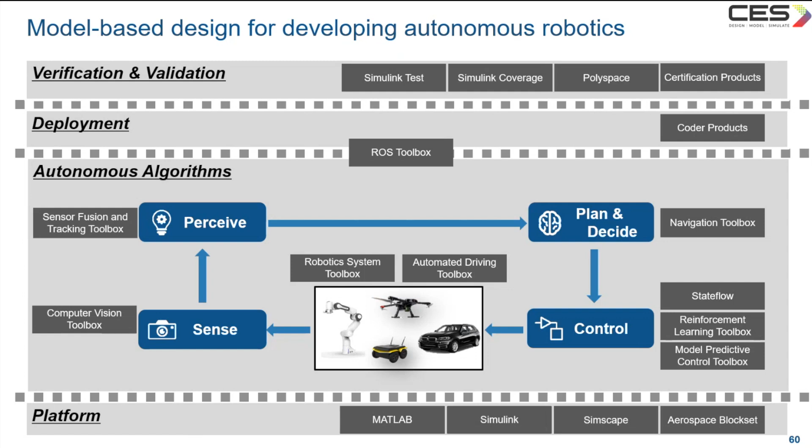Here are some resources to help you get started. From the MathWorks website, you can access the ebook for developing autonomous mobile robots using MATLAB and Simulink. We also have solutions for mobile robots with MATLAB, and for each tool I have mentioned, there is a product page that comes with documentation, relevant examples, and so on. For the platform design, mainly I was talking about Simscape Multibody, so there is a free Onramp course available on the MathWorks website to help you get started with Simscape Multibody. You need to just have a MathWorks account for accessing the same.